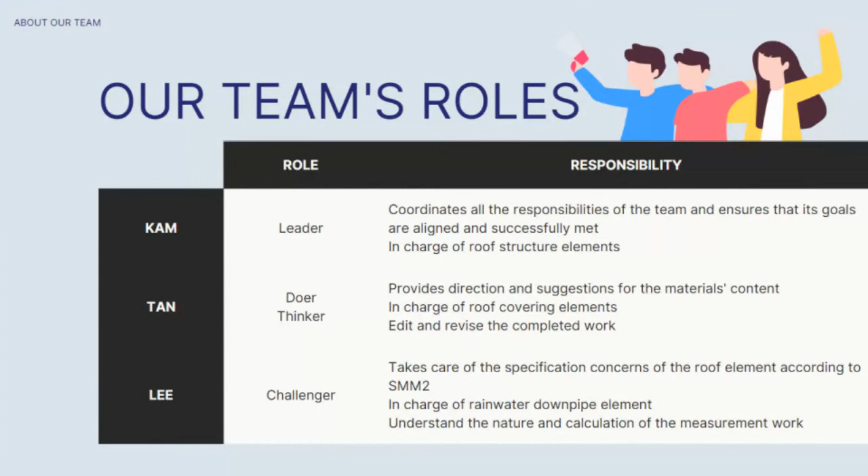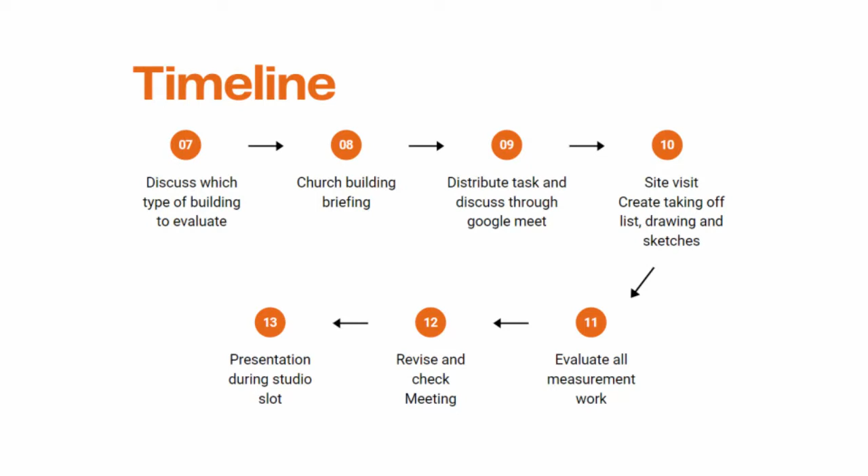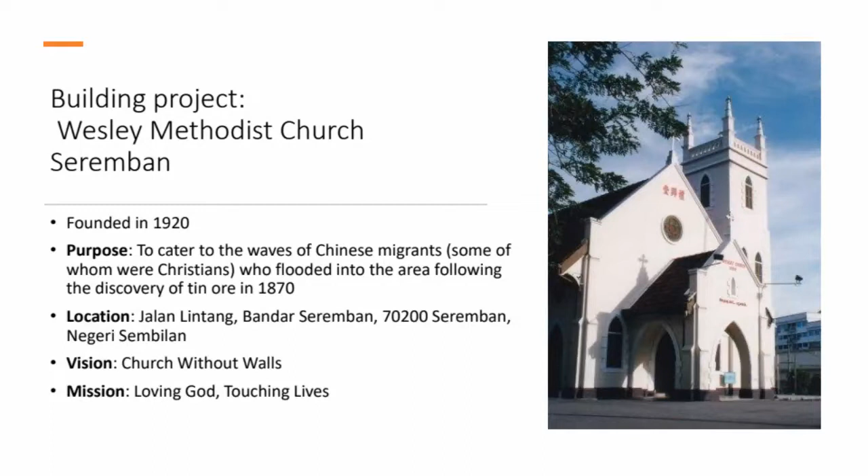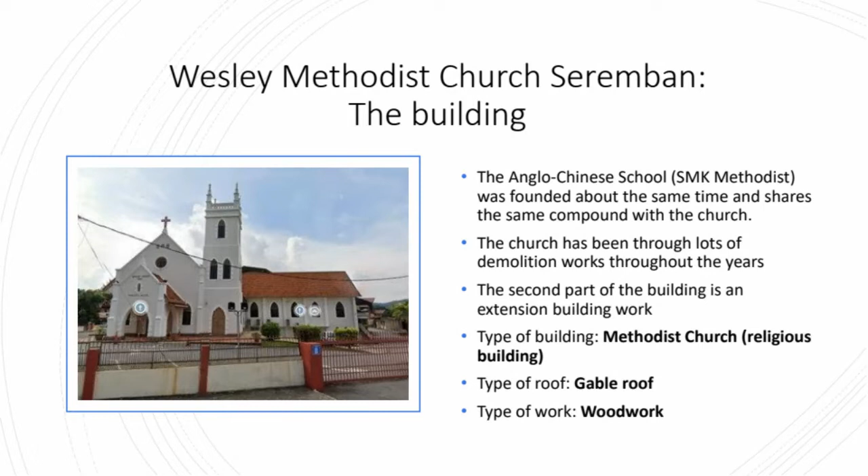The type of building is a Methodist church, a religious building, and the type of roof is a gable roof. The type of work is wood work, except for the metal work for the fish plates and the bolts and nuts.

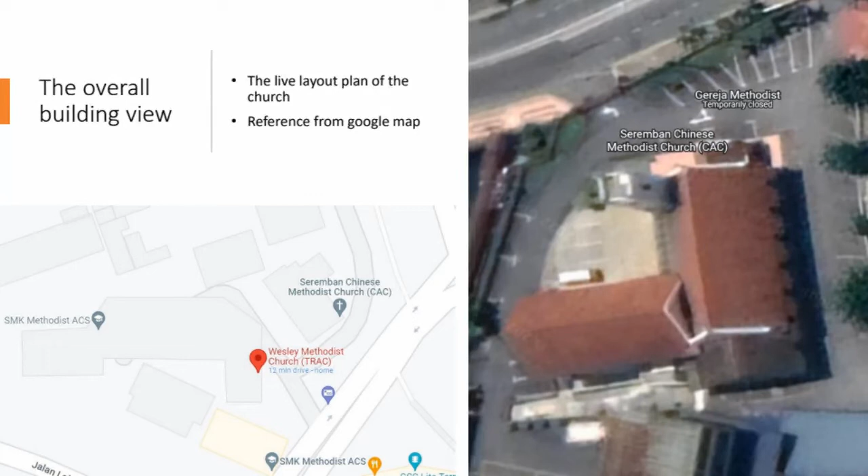This is the overall view from Google Maps, a reference for where the location is. This is the overall view of the church. This is the best photo I could find online, provided by the church website.

So, our group site visit. After speaking with the person in charge from the church office, our site visit was scheduled for 3rd of November, Thursday morning. We arrived at 9 a.m. to meet with Ms. Kiran from the church office for the visit.

We took a lot of pictures for the measurement work. We also discussed the roof structure, roof coverings, and rainwater downpipes.

This is our acknowledgement and appreciation. We'd like to express our gratitude to Ms. Kiran and the church authorities for the opportunity to have a site visit. This is Ms. Kiran - there was supposed to be another person in charge, but he was having some issues, so Ms. Kiran was the one who guided us on this church visit.

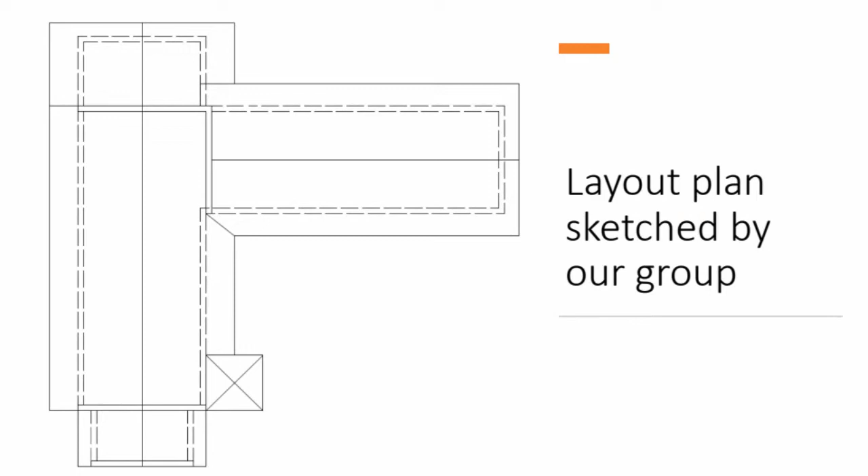So this is the layout plan sketch by our group. We used AutoCAD, I think this one is enlarged purposely. This is the main part of the building, and this is the extension part. So all of them are gable roof.

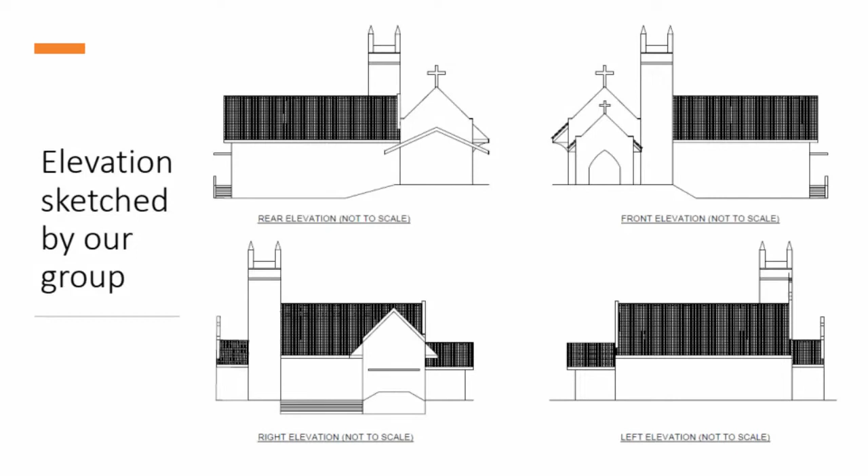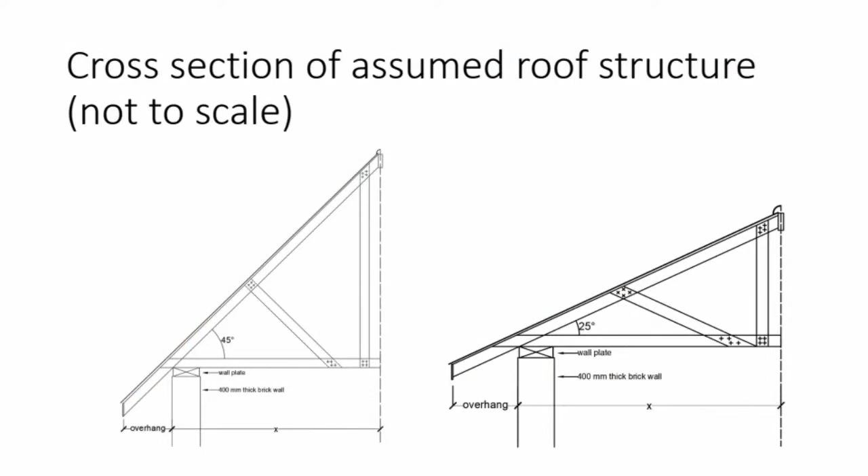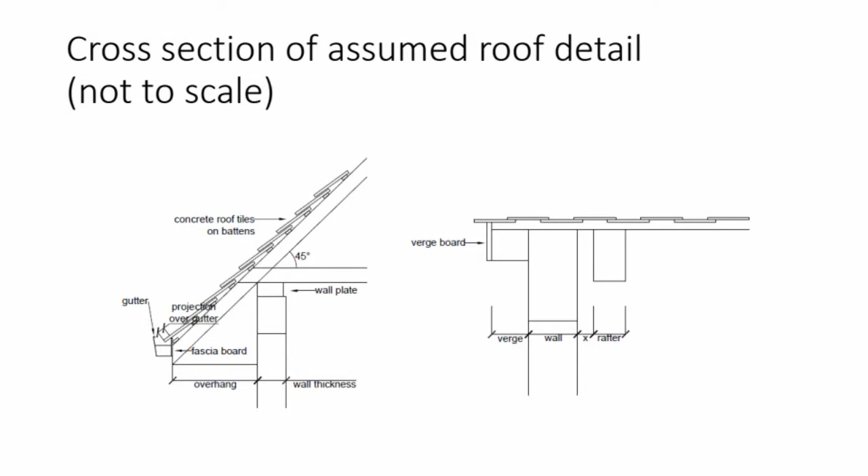So this is the assumed roof detail. As per usual, it is mostly identical to our tutorial and lecture notes.

So now I will be presenting the roof structure prepared by me. First, we need to look at the taking off for this structure.

Madam, excuse me, hello madam. Yes, hello, yes, yes. I think I need a moment because this PDF doesn't show the entire screen, can you give me a moment to change it? Okay, can you see the entire slide? From my part I cannot see the entire slide, but I can see the roof structure take off, is that the one you want to share? Yes, can you see the 10th item? Because I can't see it from my side. Yes, I can see 10 items. Okay, then I will proceed.

I'll continue. So for the roof structure, we have the sawn pressure treated Group B timber as described. We have the wall plates, the pitch roof members, and the ridge board. All of them are calculated in meters.

According to clause M2.1E, it is measured in linear meters and describes the section, then the types of quality of the timber treatment to timber. This one, and then this one also is the same.

As for the metal work, as described, we don't have the rough surface because it's covered with ceiling finishes. Next is the metal work as described.

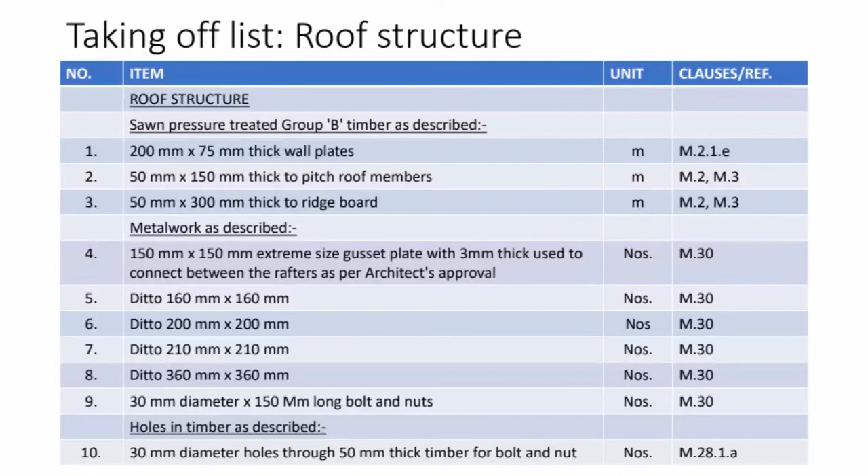And then holes in timber as described, all grouped together because they are all in the same diameter. So next.

So for the first item, this one is the wall plates. So for the wall plates, we calculate as like this. On the wall plate girth, we got A, B, C, and D.

Here is the internal corner because here is a brick wall. The brick wall is only where we can see the external part of the building. Actually, internally it doesn't have a brick wall because you can access it. So the calculation method is like this, and you need to further, on the internal corner got 2, so you times 2 and 2, then times 2, then 200. This is assumed, all is assumed.

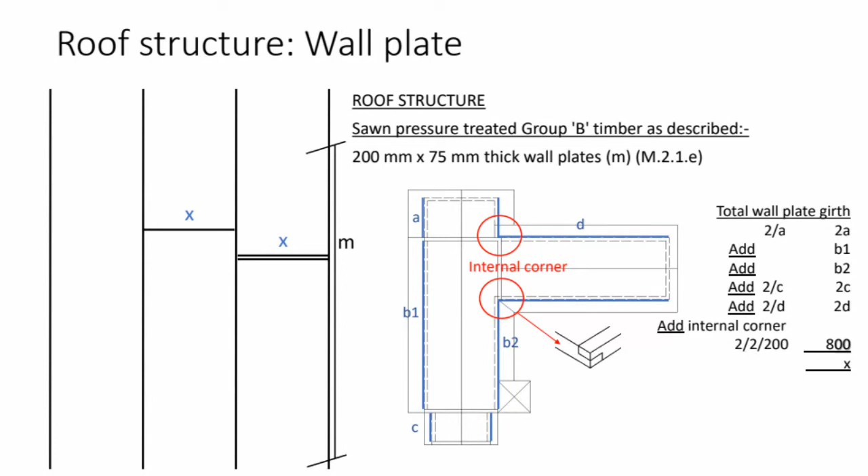And next, for the pitch roof members, our group assumes all pitch roof members are in the same dimension. So first, the calculation method is the rafter numbers of each area. This is how we evaluate.

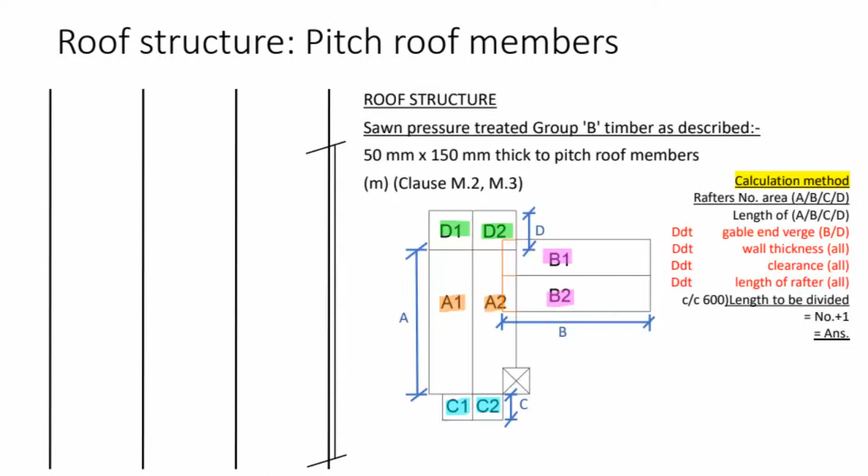Then for length A, B, C, D, we do it like this because we show you how to measure the method, as we don't have the exact dimension of it. So for length ABC, you need to deduct the gable end verge for B and D, and then for wall thickness, clearance, and length of rafters, all need to be deducted. We assume the center to center is 600, then it's divided, and the outcoming answer needs to plus 1, and then we get the final answer for the number of rafters in each area.

And then continue with the rafter. So in order to know the length of each rafter, we need to calculate the half span area each one. We need to add overhang here, and then we need to deduct the ridge board here because we put it as center like this.

And then the length of rafter we can calculate by using cosine rule: total half span divided by cosine. So we set this like this because for A, B, and C it's 45 degrees and for rafter D it's 25 degrees. Also, after the sloping length, you need to add the cutting length at the end, 0.075 is standard here.

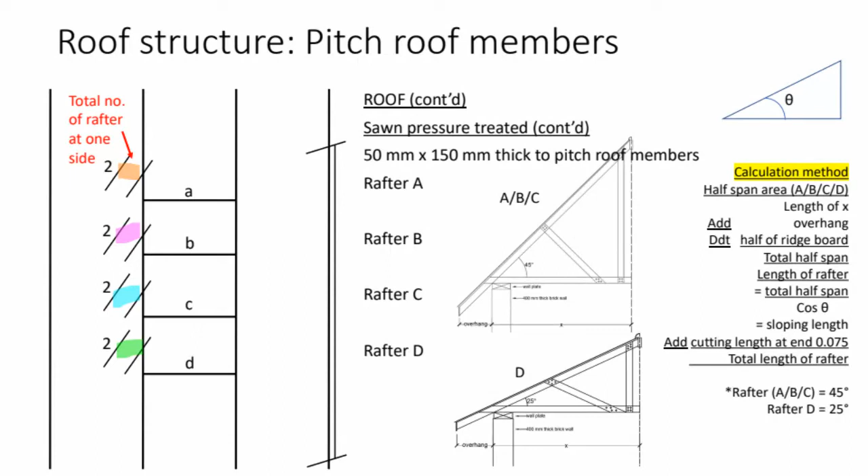So next, this one is the ceiling joist. For the ceiling joist, because we calculate as entire, we need to times 2 the length of X. It's also for the length of the ends here. So this is the total length of ceiling joist.

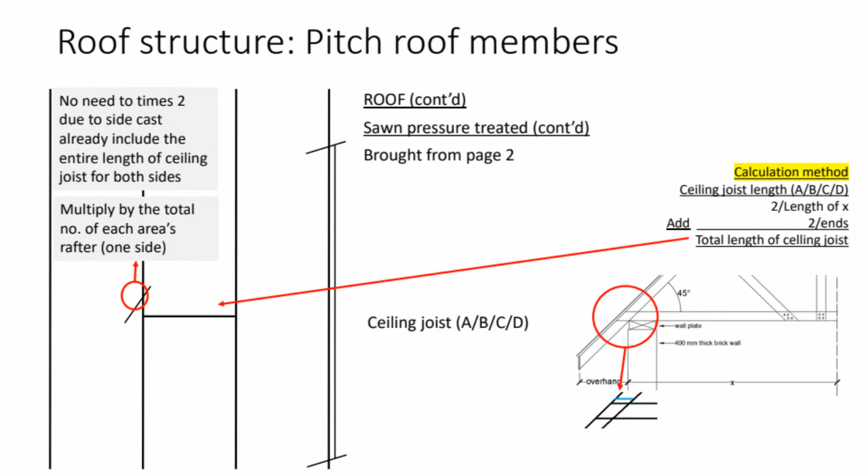So we no need to times 2 because the side cast already include the entire length of ceiling joist for both sides. So we only multiply by the total number of each area rafter, like A1 and A2. We only use one of the numbers because they are the same.

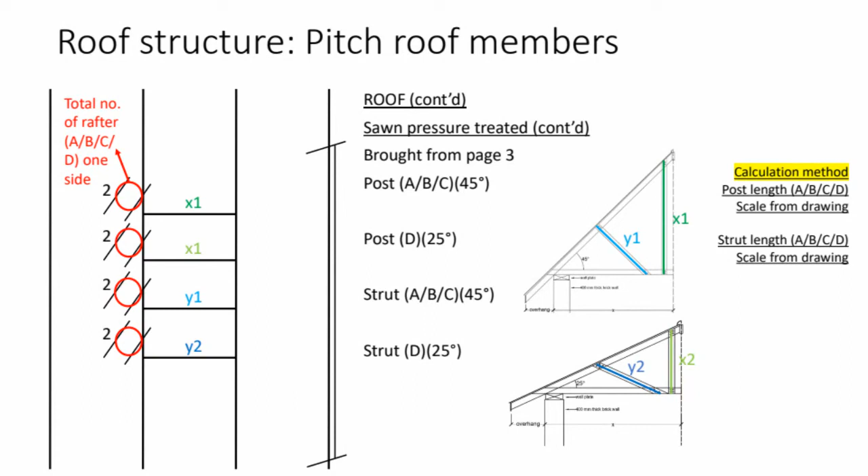So this one is the no. of rafter to be deducted. Because this is an extension part, I think if it's not an extension part, you already didn't need to deduct, but it's the extension part. They also need to remove here so they can extend this area.

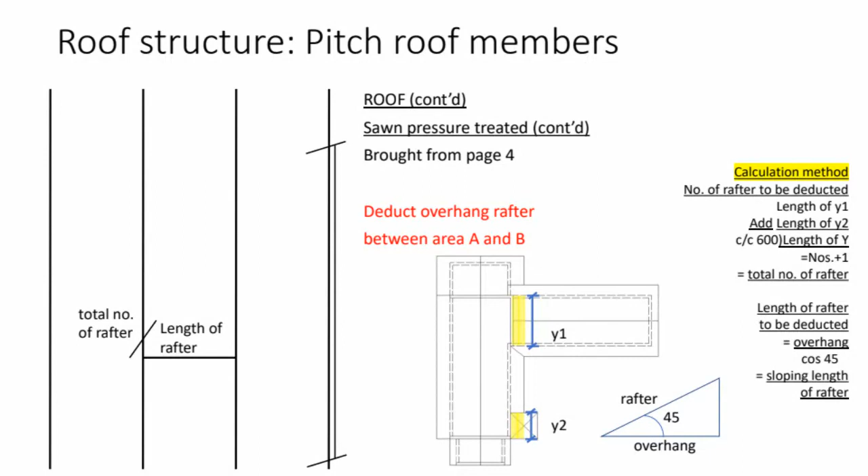Here got an error, you also need to add the cutting length. I'm sorry for this inconvenience.

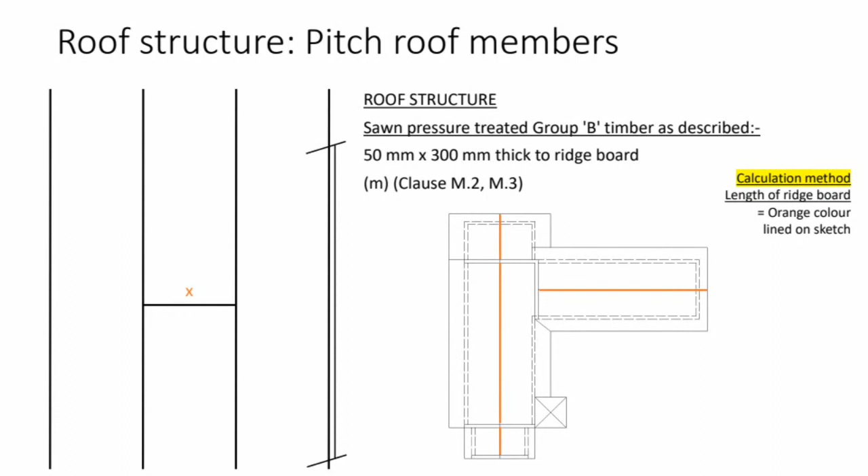So next we have the ridge board. This is similar to the ridge tiles later. So the ridge board is at the orange line on this sketch. The brickwork must be excluded until the very end of it.

So all of this is measured in meters, and for this labour for forming wrought surface as described, I provided an image we took on site, so we no need to measure due to the installation of ceiling finishes. The wrought surface is only required for exposed surface of the rafters.

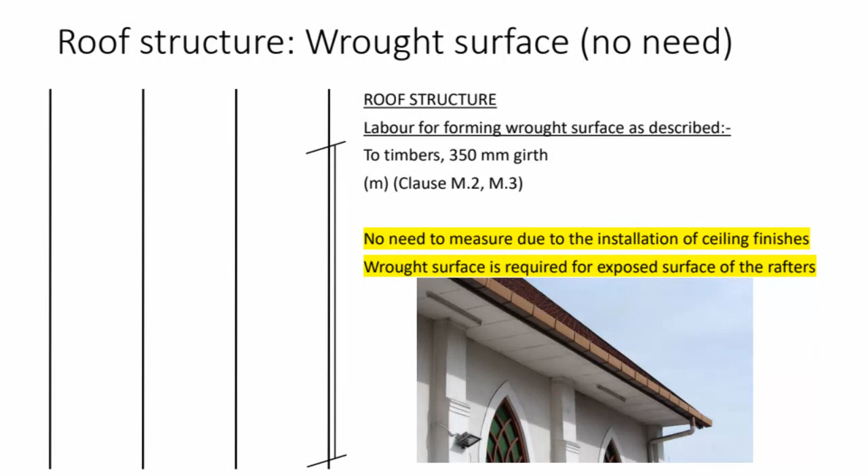So next, the metalwork as described. We got five different kinds of dimension. First, we got the 25 degrees and 45 degrees pitch roof in A, B, C, and D area. So the looking is like this.

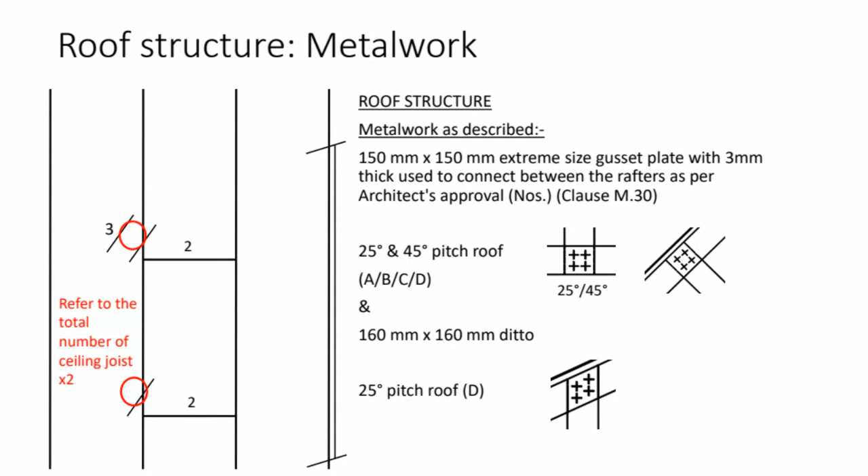So here you got two nos. and then here one no., so together we got three here. This red circle refers to the total number of ceiling joists, already times two, because this is only half span of it.

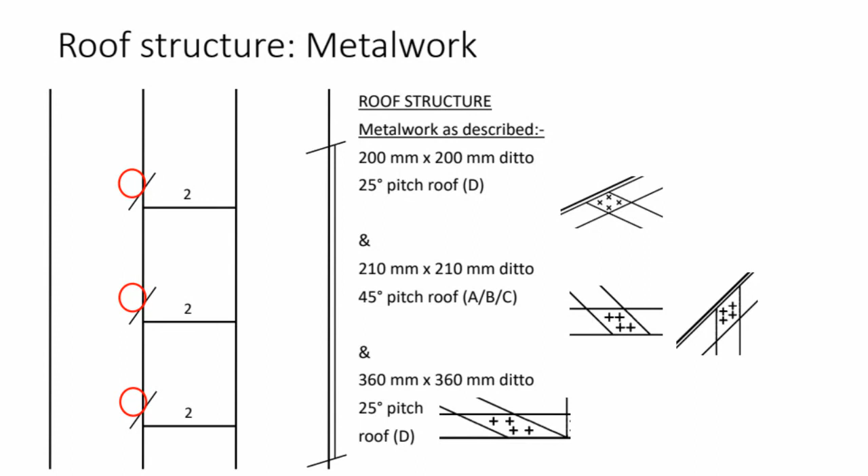So this is an example of the calculation method. Here all is calculated in numbers.

So next is the bolts and nuts. It's calculated in number and according to clause M.30. We take the quantity from the metalwork plate also. Each type of the roof structure requires 4 nos. of bolts and nuts, each we got 4, 4, 4, 4, 4. So we need 4 times 4 nos. of bolts and nuts for one half span.

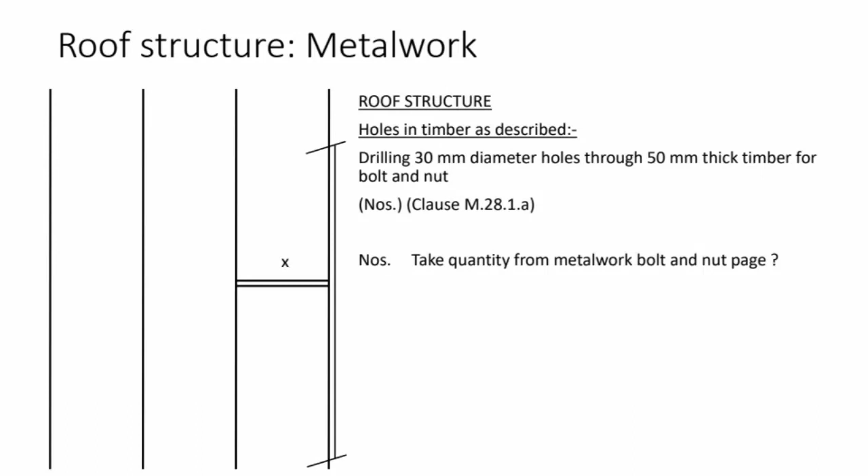And then next for the holes in timber as described, so we are drilling 30 mm diameter holes through 50 mm thick timbers for bolts and nuts. It's also calculated in numbers according to clause M.28.1.a. So how we calculate this is to take the quantity from metalwork, bolt and nut from this page. This one, I'm sorry, bolt and nut page, yes, this one.

So next, I will pass to Chin Feng to continue the roof coverings. Chin Feng? Yes.